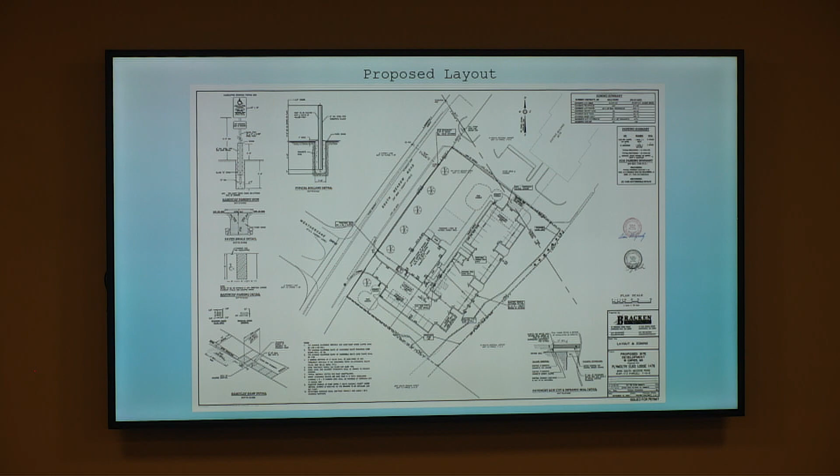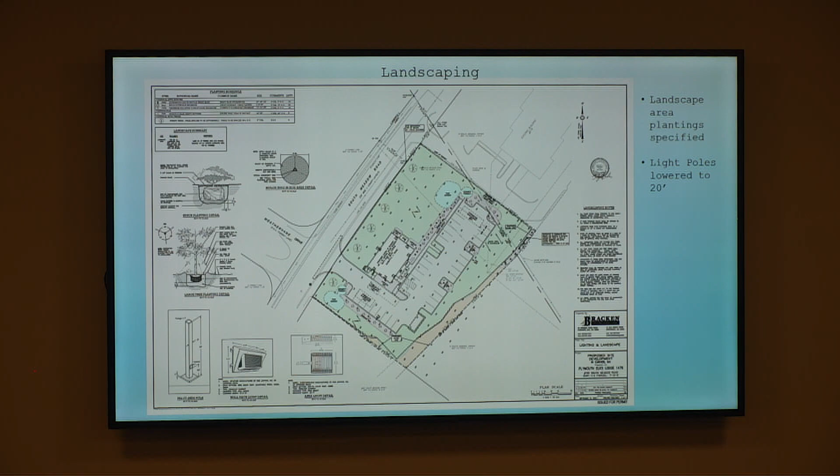Just as a reminder, we are proposing the roughly 2,500 square foot structure with all the parking, drainage, and appurtenances as described in your introduction. And again, we have added some windows, as discussed last time, to the front of the building in talks with the Elks. They're also more than willing to add some awnings to these windows as well, just to break up that front facade.

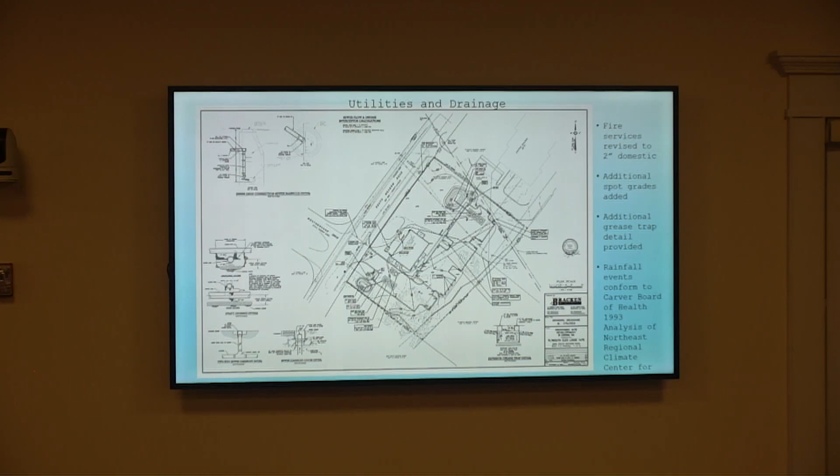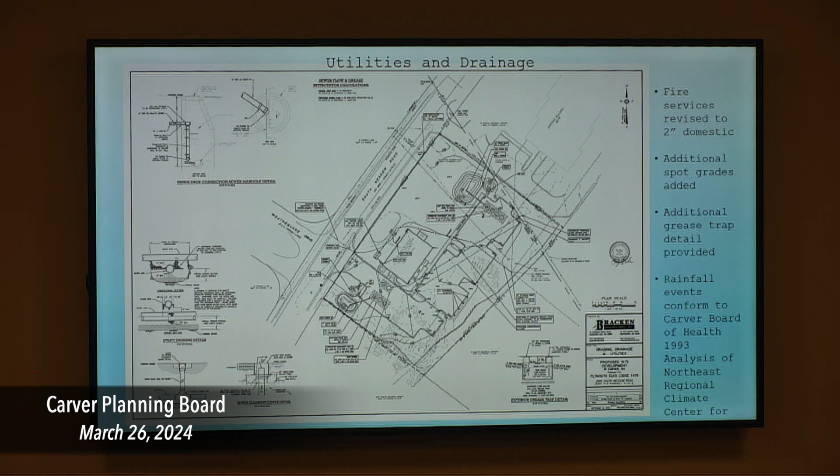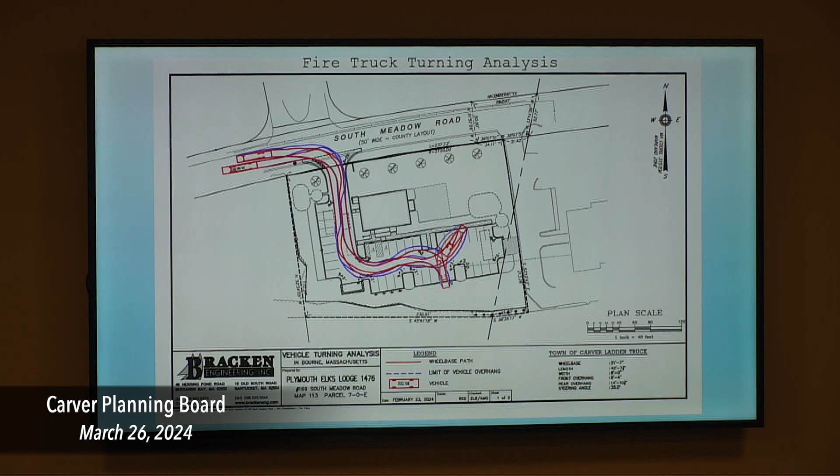I think with that, any questions remaining? I will say that we did coordinate everything with the fire department as well. They're happy, they had no further comments. They're okay with the turning radius that we've provided. We've shown that the fire department with their largest truck, their ladder truck, can both come in, turn around if there are no cars, and pull back out. If there are cars present, they are able to exit out that rear emergency exit on the other side. So with that, I'll open it up to any questions from the board.

All right, do we have a letter from the fire department? We do, we have a memo from the fire department with their concerns. We have a second follow-up email from the fire department that says their concerns have been addressed. Okay, that is referenced in the draft decision as well.

Mr. Chair, if I could - please. I did want to ask, did the issue of the sprinkler system get addressed? It did, yep - that was addressed with the fire department, and they were okay with the building not being sprinklered. And I know Mr. Williams had a question as far as the water was concerned, if you were going to be using water from Plymouth fire hydrant. There is a fire hydrant right at the town line, right there's a sign entering Plymouth, and there is a Plymouth fire hydrant there. And I'm sure if there was a fire, Carver could sneak over and hook onto it - I don't think there'd be anyone stopping them.

So there is a live Plymouth hydrant right within 10 feet of the town line, which is the property line, or it's got to be out on the street right next to where it says entering Plymouth, entering Carver. So I would think they would be able to hook onto an actual line if there's a fire.

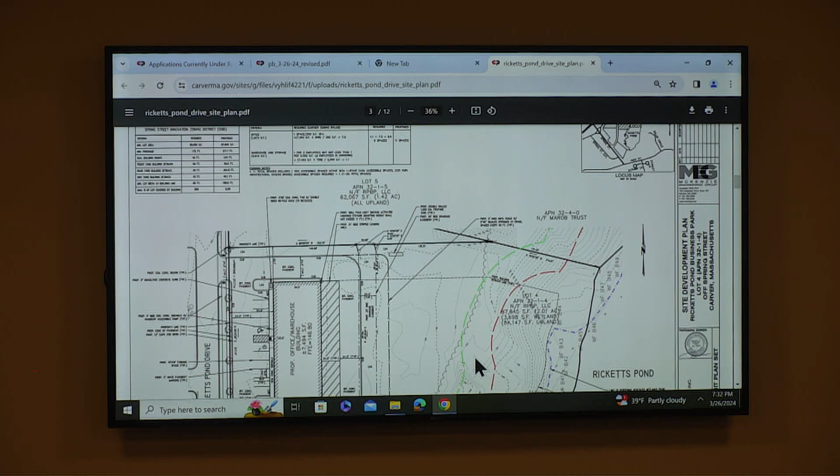Moving on to the site layout plan and why we're here in front of you today. This plan, sheet C1, shows the proposed surface treatments of the lot and the proposed building. Up to the top left of your plan, you'll see the dimensional constraints of the Carver zoning bylaw, and that comparison is our proposed development versus the requirements for that Spring Street Innovation Zoning District.

The top of the plan shows the parking calculations. So what we're proposing to do here, and as shown on our special permit application, we're filing the special permit as authorized by zoning section 2230.c, that's warehouse in a building with less than 20,000 square feet, and section 4341, which is any use with more than 10,000 square feet impervious coverage in that water resource protection zone. So the proposed development includes a 7,494 square foot building, comprised of 25% office and the remaining 75% warehouse.

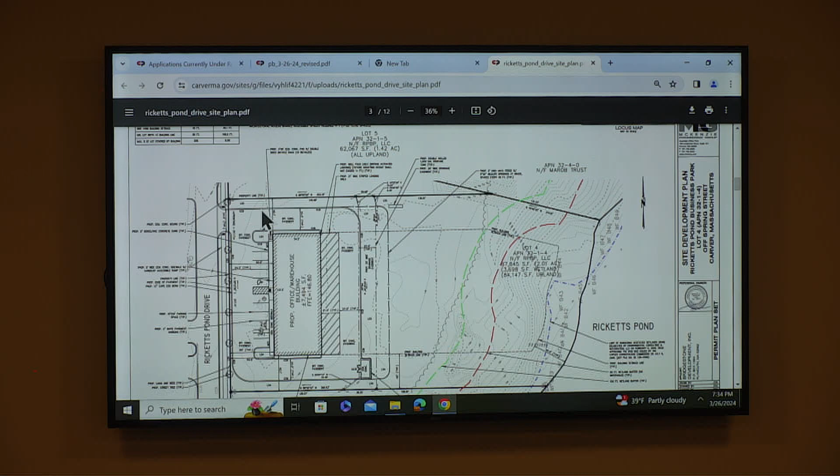Around the building, you're going to have a bituminous concrete parking area. The minimum aisle width is 24 feet for the parking area, and that's going to include a foot of Cape Cod berm on each side for curbs. We also propose, I'll get into on the later plans, related site infrastructure, drainage, utilities, septic systems, etc.

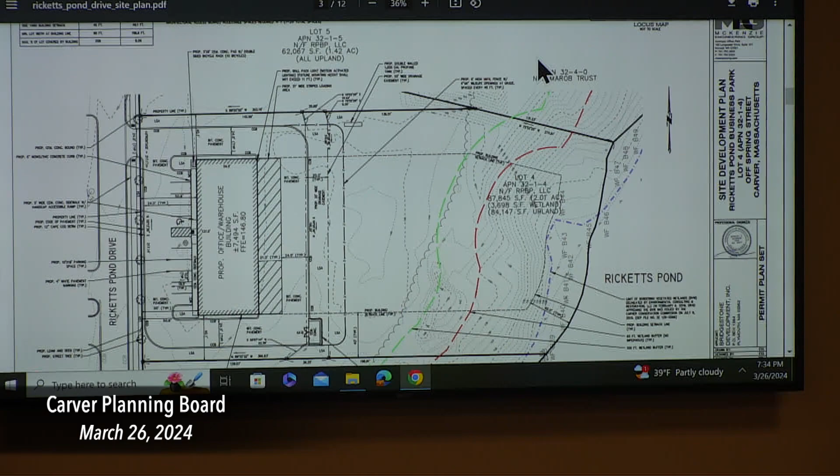So the entire site disturbance is located outside of the 100-foot buffer zone to bordering vegetated wetlands and the Conservation Commission jurisdiction. That 100-foot buffer zone is shown as this green line on the plan, and our site disturbance, our grading, our proposed parking area is well outside of that. So no notice of intent filing is required with the Conservation Commission.

The bituminous concrete parking area is going to include 11 parking spaces along the front of the building, as well as a 5-foot wide cement concrete sidewalk. The loading bays for the warehouse portion of the building are going to be located at the rear. In total, we have 45 feet of width for a box truck to access the warehouse component of the building. A handicap accessible ramp, as well as a handicap space and van accessible space, is located along the front of the building for access for people with disabilities.

Landscape buffers are provided along all sides of the development. We provide them along the side lot lines, the front, as well as the rear, and I'll get into that later on the landscape plan.

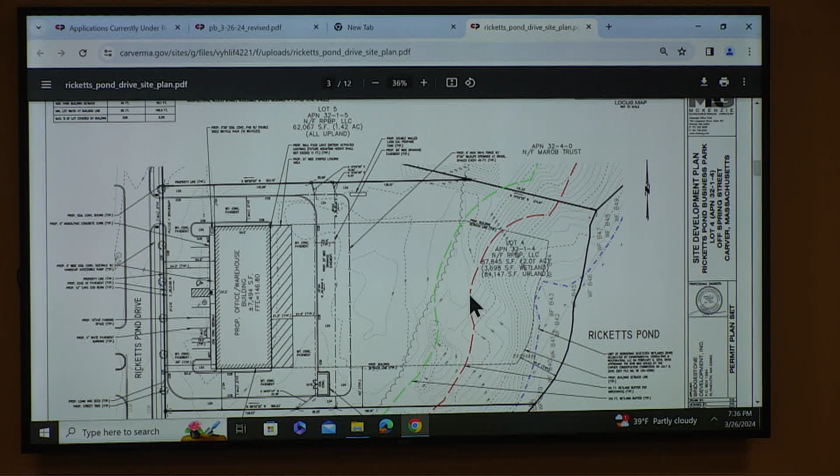And on the first sheet, the legend and abbreviations sheet, you'll see down at the bottom, we're requesting a waiver for the parking lot design component, since I believe we exceed the 8 parking spaces allowed in the front of the lot. We're providing 11, which exceeds that requirement. The reason being, we think it's a safer design for pedestrians to separate the parking component for tenants away from the warehouse and the loading areas in the rear of the building.

We don't want pedestrians trying to walk and access the front of the building to be in that loading zone. One alternative I did look at was taking 3 spaces, so we would have 8 in the front here, and adding those extra 3 back towards the dumpster area. But that didn't make sense, and we believe this is a cleaner, more straightforward design.

So moving on to the grading and drainage plan, sheet C2. Our goal was to design a drainage system that complied with all local and state stormwater management regulations, as well as attenuates the 2, 10, 25, and 100-year storm events. To do this, we laid out a closed drainage system consisting of a series of catch basins and drain manholes to capture the impervious runoff from the proposed parking area.

So the runoff from this lot gets accepted into the eastern infiltration basin. That eastern infiltration basin for the subdivision accepts all runoff from these eastern lots. So to double check our stormwater report, what we've been doing is updating the original 2019 stormwater report filed for the subdivision with these new impervious area calculations. Overall, it's a reduction in impervious surface from what was estimated for this lot and the eastern side of the development as a whole. The 100-year flood elevation decreases in that basin from elevation 138.45 down to...

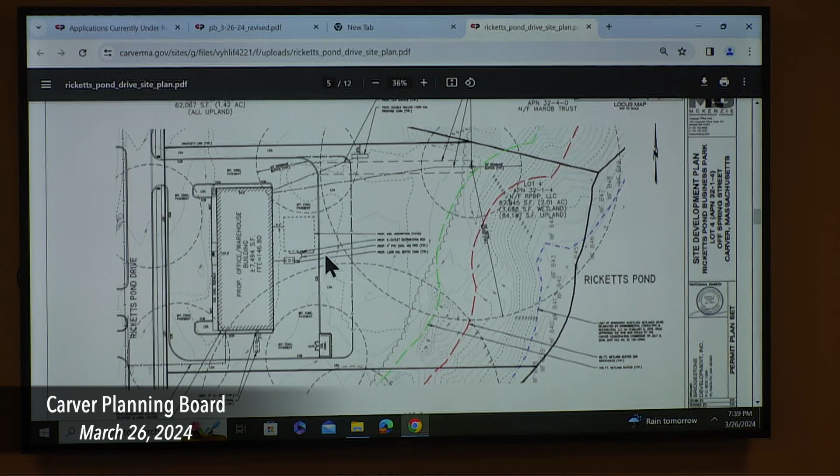And lastly, we provide a septic system sized for the building, for the office and warehouse components, which will be eventually submitted to the Carver Board of Health for approval. So we designed this with the Carver Board of Health regulations for setbacks from catch basins as well as wells to that septic system, so we're in compliance with that.

The next sheet I'm going to discuss is LA1, which is the landscape plan.

The landscape plan was designed using pollinator species, from the UMass list I believe. The side yard consists of white pine trees, cedar trees, pussy willow, and endless summer hydrangea shrubs. In total, along those side lot lines, the side buffers, you have 6 trees and 13 shrubs on each side.

The front lot line, the front buffer, is going to consist of pin oak street trees spaced at 35 feet apart; those were originally part of the subdivision design. In addition, you'll have red cedar trees, white pine trees, pussy willow shrubs, and hydrangeas. In total, you'll have 9 trees and 8 shrubs located along the front of that line.

There's existing landscaping to the rear of the site that will remain at grade. This clouded line I'm running the cursor across is the existing tree line—that's really the extent of the woods on the site. As you can see, it's a little over 100 feet, maybe 120 feet in width. The extent of our grading and limit of work is shown by this silt sock erosion control barrier, so we're well outside of that wooded buffer. We don't plan on disturbing any of the existing trees back there.

I noticed the well is right at the 100 foot mark—what's its distance from the septic area? That was driven by separation requirements between septic and wells. It's about 160 feet from septic to well. The minimum in Carver is 150, so we wanted to set the well apart from the septic for water quality purposes. Just to make sure that's not going to interfere with the other lot—exactly, yes.

Is this going to be one way around? It's 2-way driving aisles—we have 24 feet, which can support 2-way traffic, so it's 2-way around the entire building. Are we expecting 18-wheelers? I believe this was designed for the maximum vehicle being what we call an SU-30, like a 30-foot-long box truck. What's the use? The use is 25% office and 75% warehouse.

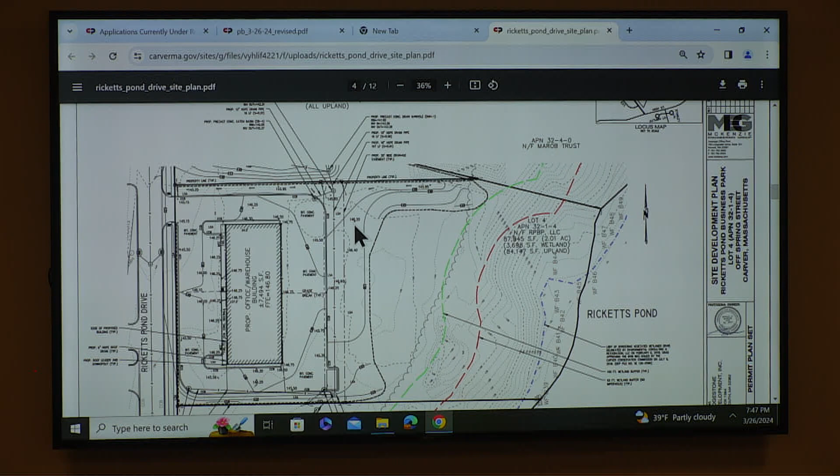If you look at the 146 elevation markers I'm zooming in on each side, I created a berm to completely separate the development runoff from the undisturbed areas. By putting a 146 elevation on each side here, I created a high point—you'll see 146.2, 146.4—acting like a grade break to push runoff to each side. From where I'm showing the cursor to the left, that runoff flows into the parking area; from here to the right, it flows down the slope. So we don't anticipate that issue. Excellent.

My last concern is going to be - I see that your vegetative barriers on the north and south side are acceptable to me. It's something we've gone over a lot, but the one on the street side is only 2 feet. We've discussed that the sidewalk is part of the required roadway system and doesn't include this, but there should be more than 2 feet, at least that's all I'm seeing listed on my sheet, and it should be at least 10 feet.

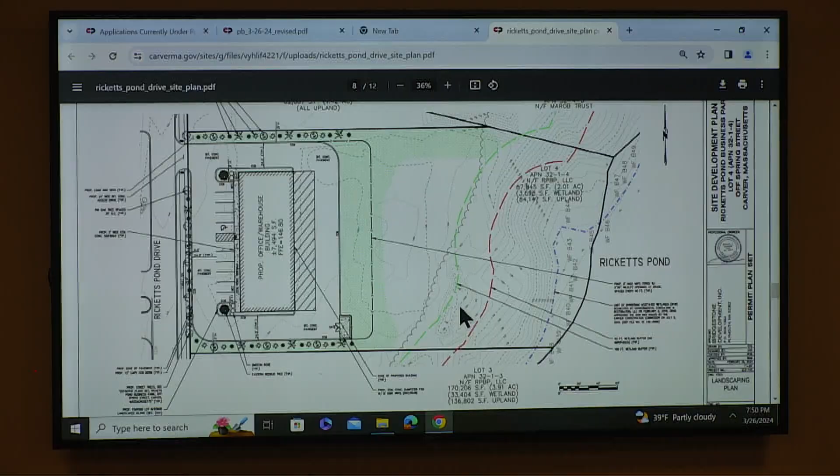Would landscaping be preferred over moving the 3 parking spaces to the rear, like I mentioned earlier? So now we eliminate the need for a waiver - there's still going to be a waiver because you're parking in front of the building. We're giving you a waiver for parking in front of the building. Whether it's 8 or 11, it's parking in front of the building, and it's going to require a waiver from us.

In excess of 8 spaces, I believe. Right, and I personally don't have an issue with the 11 spaces. I just want to make sure it's properly buffered. Okay.

Do we have any questions or concerns from the board? No, I don't, just bang up job. Yeah, you've come a long way.

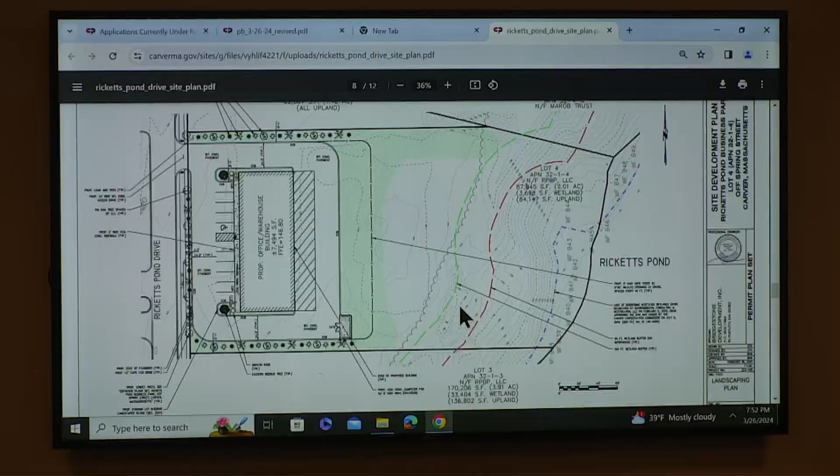Now, this is a public hearing. Is there anybody from the public that wishes to ask questions, concerns, or comments? Seeing none - because I see 2 young men back there, and I expect they're here for their civics class.

So we haven't heard back from Fuss and O'Neill in regards to this yet? No, in our conversation with Andy this afternoon, he anticipates having the review letter out hopefully tonight, since I didn't make him come here. So he's hoping to have that out early this week, hopefully tomorrow, and we'll get it to you guys as soon as it hits my desk.

I expect the conditions we'll set will be typical to what the other sites were in regards to public access and signage.

And this doesn't have an infiltration basin on site, correct? I'll ask - drainage is piped from here down to the infiltration basin in the front. Yes, there isn't anything on site. So you're looking at lot 4 here, and if you follow these easements, everything's going to the south to this infiltration basin, in between lots 1 and 3, right? Yep.

Which is what you had talked about before, with the amount of freeboard we have available in that basin to take the stormwater flow from the site. Based on the size that we reduced the building by, it's eliminated a lot of that.